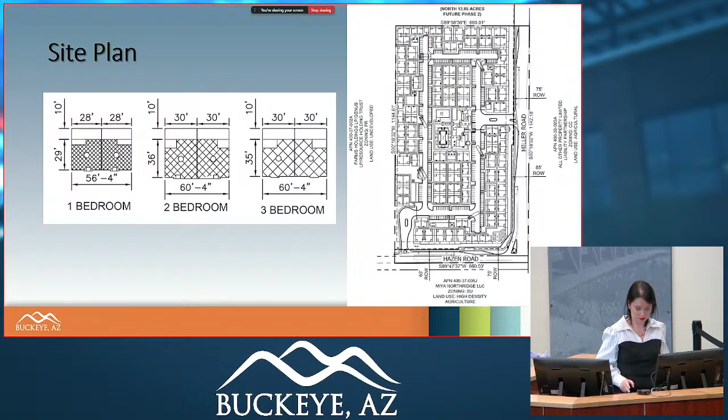And this is the site plan. It's been rotated so that north points right, so it would fit on the slide a little better. The primary access, highlighted with the green arrow, is from Miller Road. Secondary access, in orange, is from Hazen Road, and there is an emergency access that goes to the west, shown by the red arrow at the top of the screen.

In red outlines, I'm highlighting all of the gated entries that are on the site. There's ample room for queued vehicles as they enter the site, so there's no circulation or backup issues.

Visitors accessing the leasing office are able to do so without needing gate access, and they can park. There is also a centrally located community clubhouse, the leasing office, a pool, and a dog park, which I've outlined in blue.

There is a future Phase 2, anticipated to be to the north. Right now, no cross-access is going to be provided between Phase 1 and Phase 2. But there's a stipulation that if, for whatever reason, Phase 2 is unable to provide the required points of access to meet all city requirements, then it would need to provide cross-access between these phases. I'm highlighting that area because it's the most logical point of connection if cross-access were required.

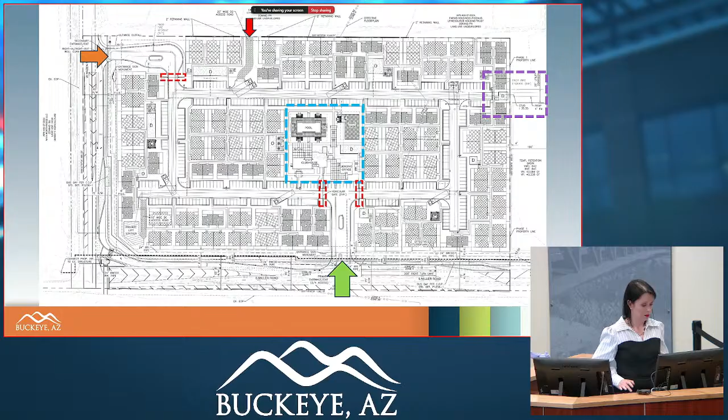For landscaping and open space, both the open space provided and the usable open space exceed the development code requirements. Turf is provided throughout the project in more high-visibility locations, and it's more for active open play areas.

The plant palette is generally low water use plants and shade trees throughout the project. There's approximately 300 square feet, plus or minus, of private open space per unit, which I highlighted on the unit layout earlier, showing that private rear yard.

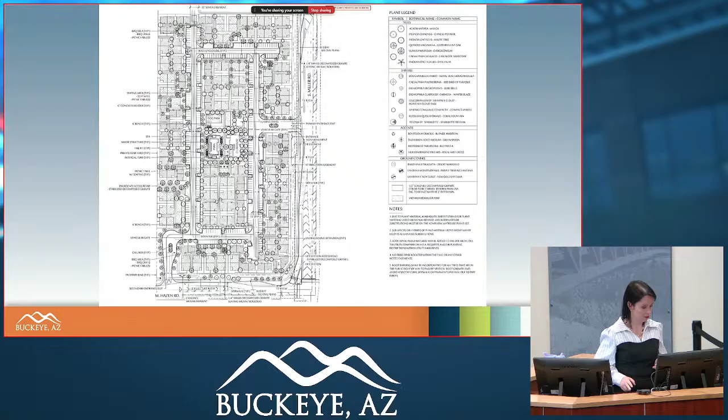This is just an overview to see the massing of all the different plantings proposed on the project. I'll zoom in on one key area, the centrally located clubhouse, pool, picnic area, fire pit, and the centrally located dog park in the center of the project. I already highlighted that there's turf of varying sizes scattered throughout the project, just in one spot.

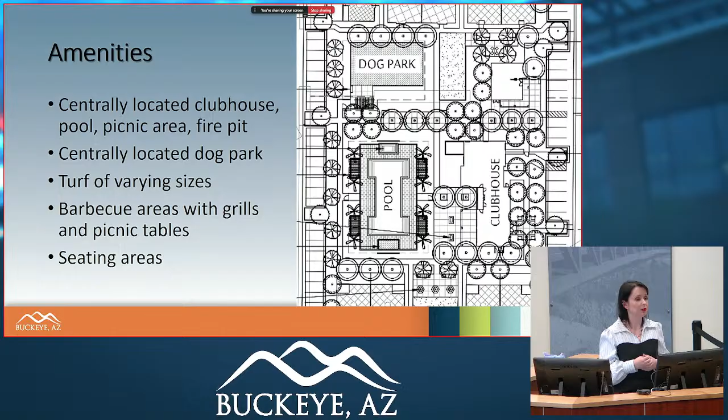There are barbecue areas with grills and picnic tables, and various types of seating areas. So there's a lot of equity in terms of making sure there's access to different amenities for different age groups throughout the project.

I'm not going to show every single elevation provided with the P&Z packet, but I'll try to highlight all the different styles and color schemes. They are proposing a variety of architectural styles: Desert Modern, which uses some really cool contemporary angular roof lines you can see on the clubhouse here, as well as some Spanish and farmhouse elevations.

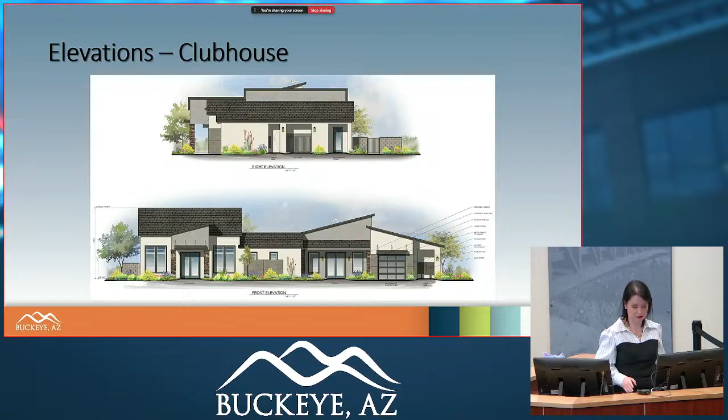The movement, articulation, and material variety all meet or even exceed our development code requirements in terms of design. They are providing six color schemes, which I'll show examples of throughout the next few slides. It's also exceeding our standards.

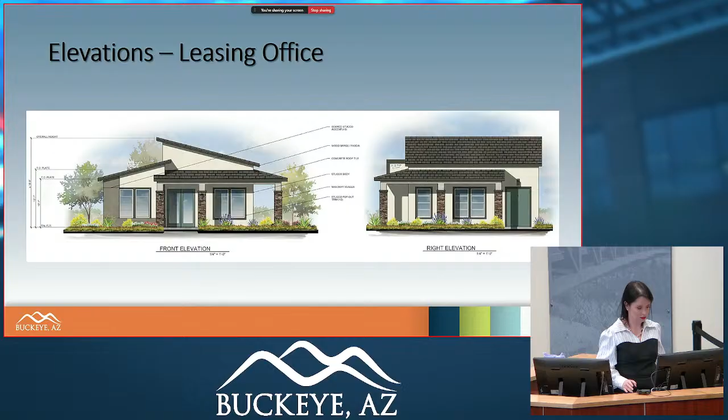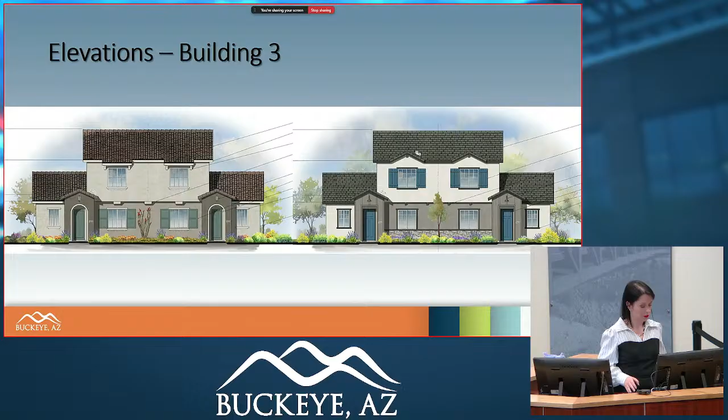I believe there are 3 color schemes provided for each building type.

For utilities, infrastructure, and services, the developer is responsible for any water and sewer infrastructure improvements per the reports submitted with the site plan. The developer will construct any required half-street improvements. There was a TIA that was reviewed and submitted with this project.

I don't believe it's been approved yet, but all final requirements of that TIA will be reflected on any civil permitting. There are evenly distributed dumpster enclosures in a loop pattern for easy access. The project will accommodate drainage in accordance with the submitted drainage report, and the property will be serviced by city fire and police.

Our recommendation is to approve PLZ SP 23-00013, subject to conditions A through V in the staff report. The following reasons: it furthers goals of the general plan, it conforms to all code requirements, and there's no outstanding issues from any of the reviewing departments. I'm happy to answer any questions.

The applicant is present. I think Julie is present online, and Matt is also here in the audience, so if there's any questions I'm unable to answer, I will defer to them. But otherwise, thank you for your time.

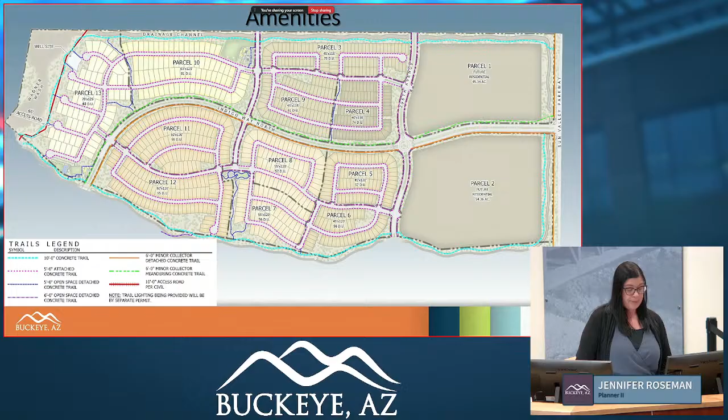The trails are strategically placed along key boundaries, including the northern edge adjacent to the drainage channel, the western perimeter following Wagner Wash, and the southern boundary along Channel V2-R4, which is the official name. These trails provide residents with scenic walking, jogging, and bike paths while integrating seamlessly with the surrounding landscape.

The planned trail system will seamlessly connect residential areas to key community amenities, including 2 neighborhood parks in parcels 10 and 13. These parks will feature shade structures, fire pits, a dog park, basketball court, and playground equipment, creating inviting spaces for recreation and relaxation.

In addition, parcel 7 will include a smaller pocket park with shaded gathering areas and turf, offering a natural play space for residents. A future neighborhood park is also proposed for parcel 1, while parcel 2 is planned to include a pocket park, both contingent on future residential development. If these parcels do not develop as residential, the planned parks will be relocated within future phases to ensure accessible green space for the community.

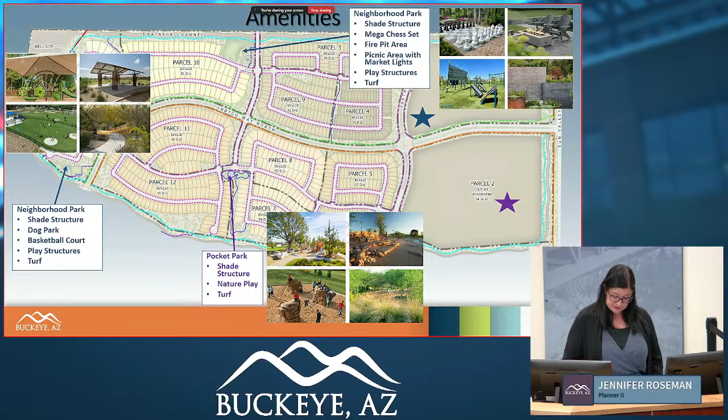To throw some numbers out, the HOA maintained tracts, including open space and parks, cover 57.89 acres. 10 acres are designated within that as active open space. Wagner Wash along the western boundary provides 12.92 acres of natural open space. In total, the development has 70.81 acres of open space, accounting for 19.91% of the subject plat. 20% is required, but the development of parcels 1 and 2 will ensure that Village 2 meets this requirement.

Monument signs will be incorporated throughout Floreo to create a strong sense of identity and provide clear entry points into the community. Primary neighborhood entry monuments will be located along Sun Valley Parkway, while smaller parcel entry monuments will mark key access points within the development. These signs are designed with high-quality materials and landscaping to complement the overall aesthetic of the community.

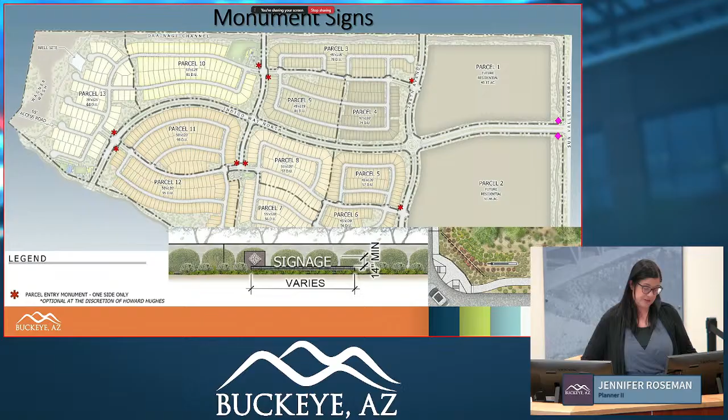Parcel entry signs, where provided, will be positioned at select neighborhood entrances to enhance wayfinding and visibility. The monument at the main entry will feature a sleek, modern design with integrated lighting and surrounding greenery, reinforcing a welcome and cohesive streetscape.

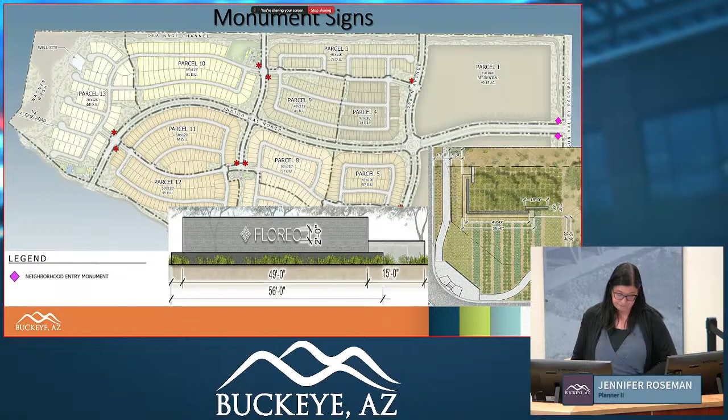Village 2 will have five key access points to ensure smooth circulation and connectivity within the broader development. These include one entry from Sun Valley Parkway via Indigo Way, two connections to the north linking to the future Village 1 through 296th and 301st Avenues, and two connections to the south tying into the approved Village 3 via Indigo Way and 296th Avenue.

The initial access will be provided by Sun Valley Parkway and Village 3, allowing for phased development and connectivity as the community grows. Major roadway improvements will include full right-of-way dedication and enhancements for Indigo Way, 296th Avenue, and 301st Avenue, ensuring efficient traffic flow and accessibility for residents.

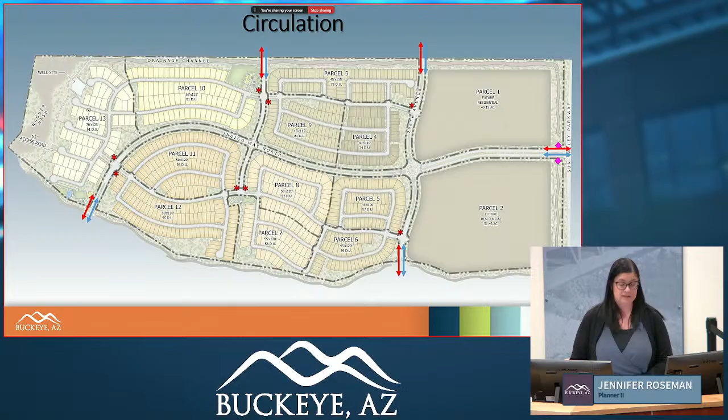In February 2024, the code was amended to eliminate notice requirements for preliminary plats. However, because the applicant submitted prior to approval of the code amendment, the applicant was required to provide a notice of application to all property owners within 300 feet, and they did so on January 2nd, 2024. No formal comments were received by staff.

The proposed preliminary plat is in conformance with the general plan, the Buckeye Development Code, and Floreo at Teravalis CMP. The use is consistent with the character of the area and is not expected to disrupt the surrounding neighborhood. There are no outstanding issues with the other reviewing departments, and the development represents an overall improvement to the city of Buckeye.

Our request to you this evening is to approve item 4B, subject to conditions A through U. Staff is available for questions, and I apologize because I was late.

The applicant? I have anybody here from Teravalis? Okay, the applicant is not here. I'm sorry, A through U. I'm thinking of my next one. So the applicant is not here? Applicant does not appear to be here. Okay. Or about online.

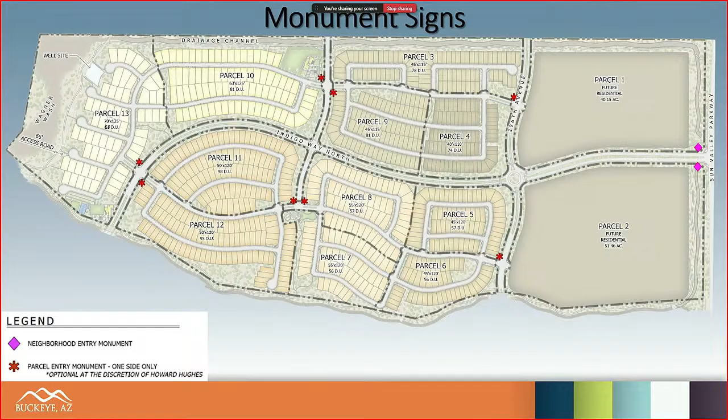I just hate the idea of creating a cul-de-sac, because I live in one. World's largest cul-de-sac. Mayor Commissioner, yes, it will end up creating a loop through, and we do have John available for any other more intense traffic questions you may have. The idea of creating a cul-de-sac, I don't want that. So we just need a loop so people have more than one way to get out of there besides that one entrance to Sun Valley Parkway.

Thank you. I have nothing further to say. May I have a motion, please?

I'll make a motion that we approve preliminary plat PLZS-23-00028, subject to conditions A through U. I'll second that. It's been moved and seconded. All those in favor, say aye. Aye. Any opposed? Motion carries.

Stay there, don't move, Jen.

Regular agenda item 4C, Sundance Apartments, site plan, public presentation by Jennifer Roseman, Planner 2. Thank you, good evening Chair, members of the Commission. Again, my name is Jennifer Roseman. I'll be presenting tonight's item 4C, which is the site plan for Sundance Apartments.

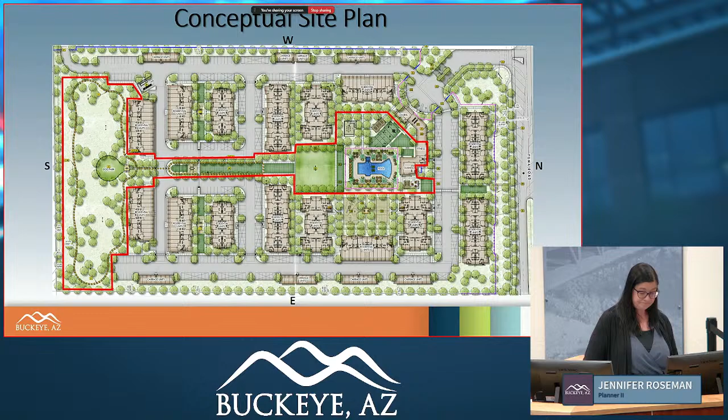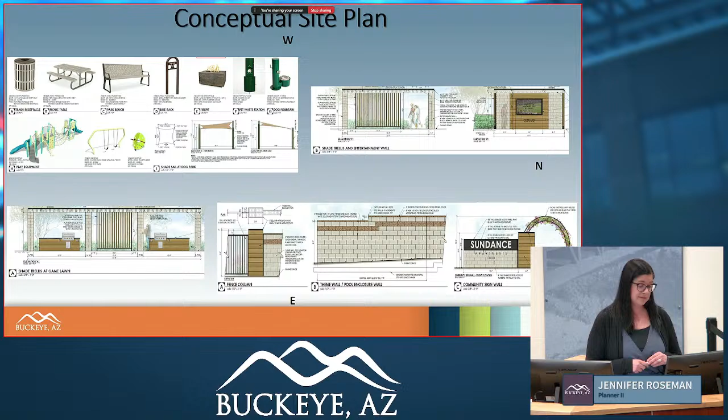The development features a modern architectural style with clean lines, varied roof lines, and a mix of materials to include stucco, masonry, veneer, and wood-like accents. The color palette features neutral earth tones with contrasting elements to enhance visual appeal while maintaining harmony with the surrounding single-family homes.

To ensure a cohesive streetscape along Yuma Road, the stairwells will be discreetly screened from public view using architecturally integrated elements such as metal mesh. For enhanced privacy, as stated earlier, the carriage buildings are designed without rear-facing balconies and feature minimal windows, reducing visibility for neighboring residents.

The site's primary and sole access point is from Yuma Road. Vehicles exiting the development will be limited to right turns only, while entry into the site will accommodate both right and left turns. A secondary access is required for emergency purposes and is provided at the southwest corner of the development.

This secondary access extends across the adjacent property to the west and connects to Apache Road. A recorded ingress-egress easement is already established to accommodate this access, so that's regardless of any development that goes in there. That access road will be there.

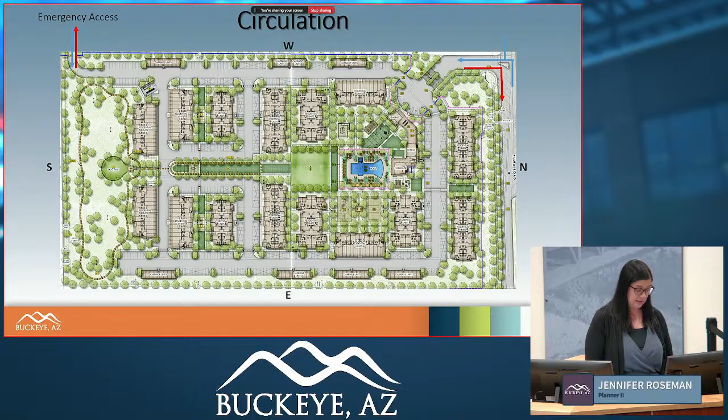The site is located within the City of Buckeye sewer and water service areas. There are existing sewer capacity issues, and through a sewer analysis done by the applicant, a capacity constraint has been identified that will affect approximately 1,211 linear feet of pipe. As a result, the developer will contribute a fair share of the cost needed to upgrade this section of the sewer system.

The off-site improvements will include the half-street construction of Yuma Road, along with the installation of a median from 241st Drive to the main entrance of the development.

The development includes a single trash compactor area serving the entire community, but to accommodate residents that don't live near the compactor, the applicant has committed to providing doorstep valet trash service twice a week, and this is also a stipulation for the site plan. Residents will be able to just stick their trash outside of their door twice a week on the designated days, and staff will come by, pick it up, and take it to the trash compactor.

In February 2024, the code was amended to eliminate notice requirements for site plan applications. However, because the applicant submitted prior to the approval of the code amendment, the applicant was required to provide notice to everyone within 300 feet of the subject site and did so on November 19, 2023. Two residents from Desert Moon Estates did call and inquire about the project, wanting to know if it was allowed per the zoning and how far the nearest building was from their homes.

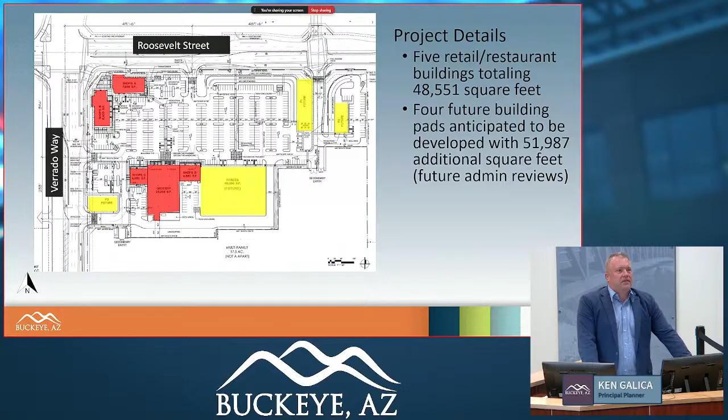So this proposal is for a commercial shopping center featuring 5 retail and restaurant buildings highlighted in red on your screen, totaling 48,551 square feet, and also 4 future building pads anticipated to be developed with an additional almost 52,000 square feet. Those future site plans, consistent with this master site plan, will be administrative reviews. We'll make sure that the buildings are consistent in appearance with what we'll show you tonight for the first phase.

Ultimately, we're just talking a little bit over 100,000 square feet at ultimate build out. The uses for these buildings all are per the mix at Roosevelt PAD, a customized use list. We eliminated some of the less intense uses we don't want to see, like mini storage, so those types of things wouldn't be allowed. So you're really looking at vibrant retail, restaurant, and entertainment types of uses here.

The only building identified for a very specific use at this point is this one here, where my mouse is hovering. That is identified as a grocer, and I got permission tonight to actually share that it will be a Sprouts. So that's one of the users that we hear from our residents quite a bit that they'd like to see. Hopefully that announcement makes some folks happy.

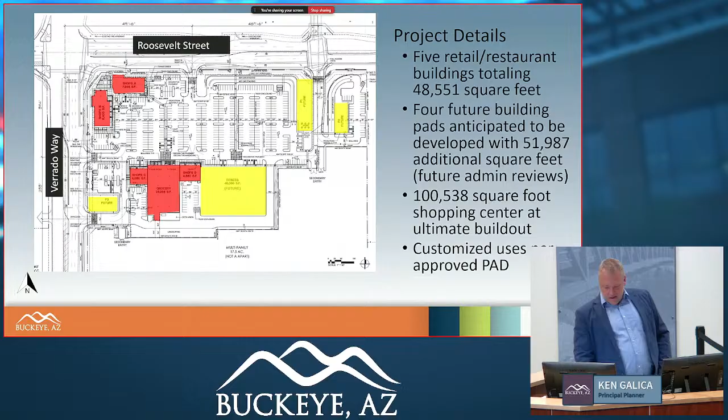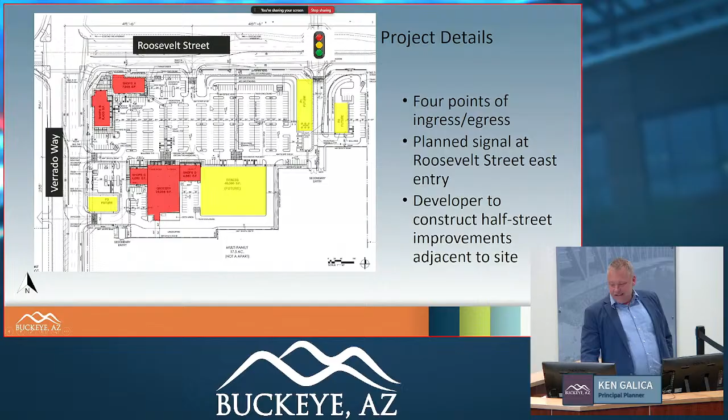The site features 4 points of ingress and egress. I should talk first about the parking spaces - it is overparked compared to what our zoning ordinance requires. 561 spaces are provided, 405 are required. So if in the future we get more restaurants than what was originally anticipated, there should be plenty of parking for that. There are 4 points of ingress and egress to the site, 2 off of Verrado Way and 2 off of Roosevelt Street.

I'll work my way around clockwise, starting in the lower left at the southwest corner of the site. That is a three-way access - left in, right in, and right out. The driveway just to the north of that is right in, right out, no left movements there. The initial, or westernmost, Roosevelt Street entrance is right in, right out, and then full access is proposed at the eastern drive off of Roosevelt Street - left in, left out, right in, and right out. So all four movements are proposed there, and there is a future signal planned at that intersection.

The developer will construct all the adjacent half-street improvements adjacent to the site.

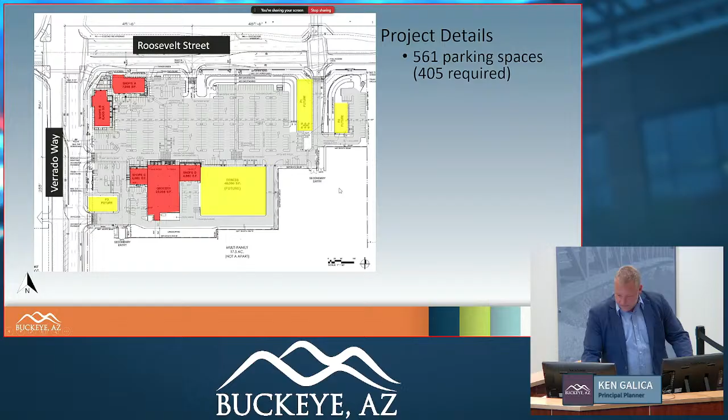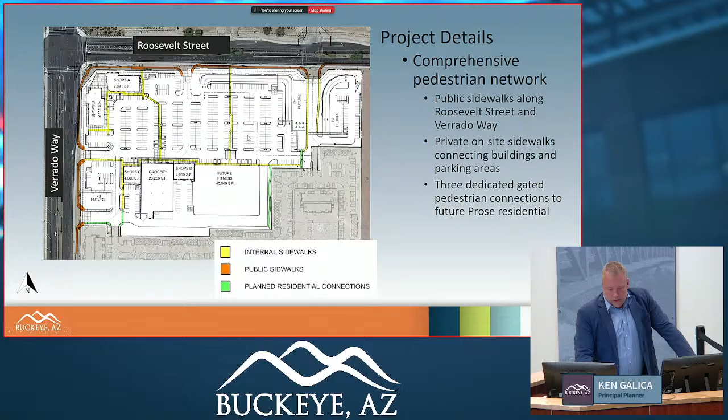20.1% of the site is landscaped area, meeting the requirements for the commercial side of this PAD. That includes 281 trees and a little over 1,400 shrubs and accents, all of which are drought tolerant.

The landscaping serves multiple purposes, of course enhancing the aesthetics and placemaking at focal points. One example is the hard corner of Roosevelt Street and Verrado, where the two buildings will create an outdoor courtyard and dining area, accentuated by some signature landscaping.

Of course, parking lot shading gives people an opportunity to get a little bit of a break in the summer. And then shading along that pedestrian network - you can see the separated sidewalk running in a median with landscaping that will keep those pedestrians a little bit cooler.

And lastly, when the future residential is built to the south, the landscaping will serve as a screen and buffer to the loading and service areas of the commercial buildings.

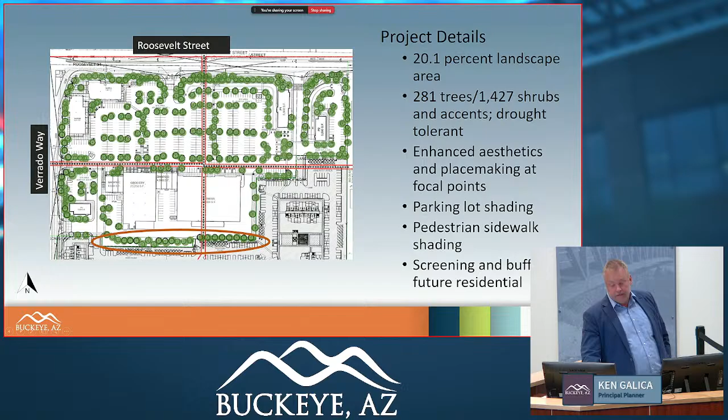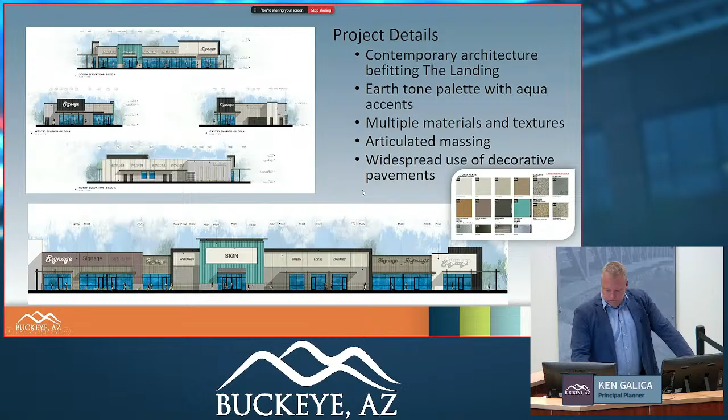We have not received any public feedback on this site plan. We didn't receive any either when we went through the more extensive rezoning process, so there hasn't been any concerns raised.

The site plan, in staff's view, conforms to the general plan and furthers our objectives for the landing to create a real vibrant activity center. It conforms to the mix at Roosevelt PAD. In our opinion it achieves the desired urban aesthetic and active edge along Verrado Way, and also Roosevelt Street. We feel it's an example of exceptional architecture as well as landscape design, and it features really strong connectivity, both vehicular and pedestrian.

All the utilities will be city-served. The developer will be responsible for any improvements to those systems needed to support this development, as well as their adjacent half-street improvements. This has been given the okay by all reviewing departments.

So with that, Chair, members of the commission, we do recommend approval of this site plan tonight, subject to conditions A through FF. And I did want to note this asterisk here.

For some reason when the staff report got converted to PDF, in a couple instances it changed the letters TI to a question mark. For instance, deceleration was converted incorrectly. So we wanted to note that we have the correct formatted version separately, and we're all in agreement that it was not intended to have those question marks.